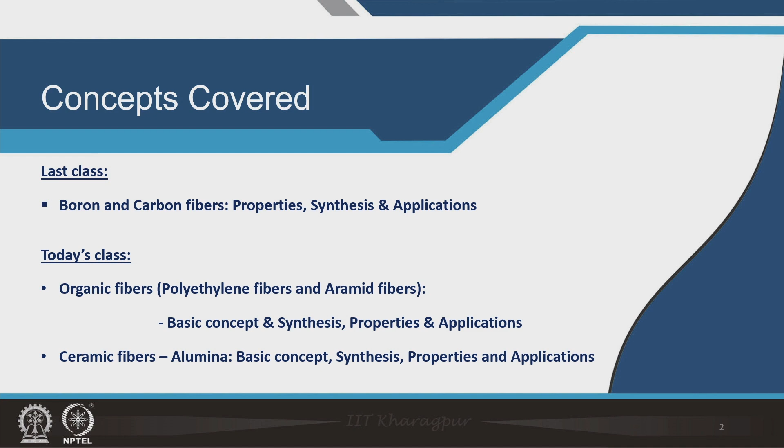Today's class will discuss aramid and ceramic fibers, focusing on alumina among ceramic fibers. In the last few classes we discussed glass fiber, boron and carbon fibers. Now I want to shift toward organic or polymeric fibers, which I haven't discussed yet, and which are used hugely in commercial applications. Then I will shift into ceramic fibers, which show extremely high temperature strength. In today's class, for ceramic fiber I will talk about alumina fiber, and in subsequent classes I will go into SiC fiber and other fibers.

Let us start talking about organic fibers, which are basically polymeric fibers. The idea is to align the long chains in the axial direction to make fibers that achieve fairly high strength and modulus. Polymer materials normally do not show very high modulus, in the range of 10 GPa, but if you align the polymeric chains properly, you can achieve higher modulus. As you can see here, the data shows around 70 GPa.

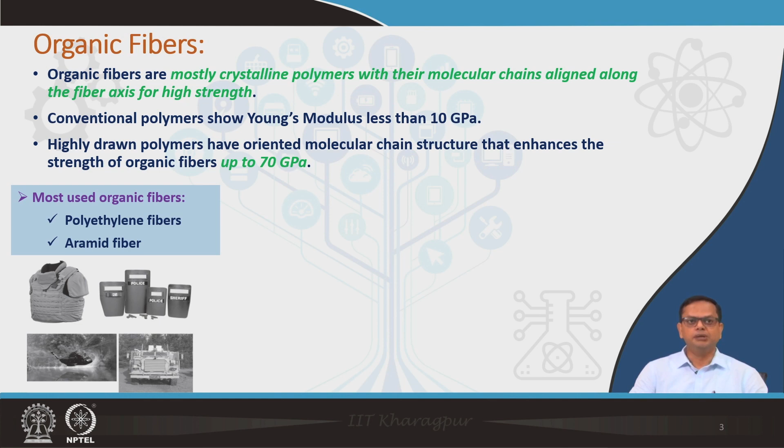Polyethylene fibers, or high molecular weight polyethylene fibers, are mostly crystalline in nature and are made by gel spinning. This spinning method is one way fibers can be synthesized, and ultra high molecular weight polyethylene is made by the gel spinning method. It shows fairly high strength and modulus, though not as high as aramid fibers, but the specific values are quite high.

Applications include protective vests in military applications, and riot shields as shown here. The fibers used to reinforce these kinds of vests are polyethylene fibers in most cases. Also Kevlar or aramid fiber is used, and then ballistic armors and similar items use these polyethylene fibers. But in today's class I want to concentrate more on aramid fiber.

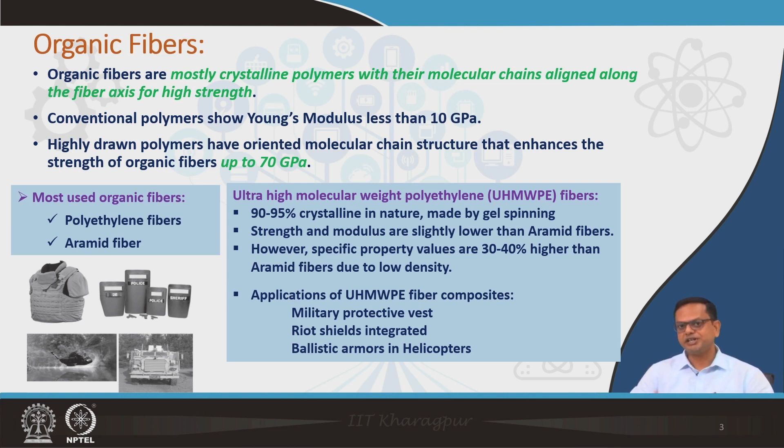Let us talk about aramid fiber. From the name, you can see it is basically a combination of aromatic and amide groups. The amide group is CONH2. This CONH2 group is the amide group, and when you attach aromatic rings to it, you get the aramid structure.

You can see here that CONH resides between two aromatic rings, but there can be multiple combinations by which amide and aromatic groups can be attached. For example, you can have a couple of amide groups together with one aromatic, or two aromatics together with one amide group. There could be multiple variations attaching amide and aromatic groups, and we do not call all of them Kevlar or aramid fiber.

Kevlar is the commercial name; there are other commercial names as well, like Technora, but basically it is aramid structure. We do not call everything with an amide group and aromatic group aramid fiber. So what is the definition of aramid fiber?

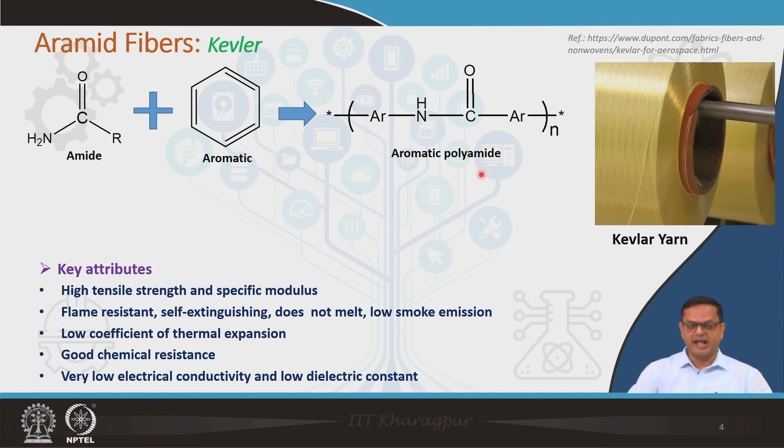One thing has to be made sure is that at least 85% of these amide groups are attached in between two aromatic groups, then only we call it aramid fiber. The Federal Trade Commission has given a definition that a manufactured fiber in which the fiber forming substance is a long chain synthetic polyamide in which at least 85% of the amide group, that is CONH group or linkage, are attached directly between two aromatic rings.

Why are we talking about aramid fiber? Because of high strength, modulus - very important factor. These are flame resistant, even though these are polymer materials. They are self extinguishing, do not melt, and have low smoke emission. That is why these are used in military applications.

Low coefficient of thermal expansion, good chemical resistance - again a very important factor - and low electrical conductivity and low dielectric constant. Because of all these attributes, Kevlar fiber or aramid fibers are used in these kinds of applications, as I was showing earlier.

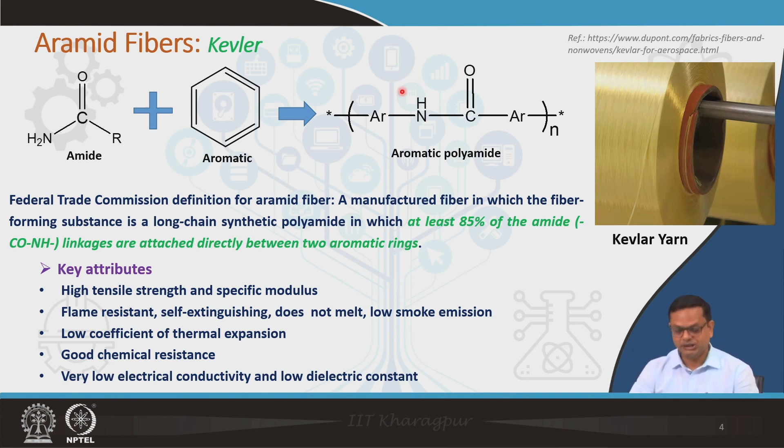Why do we need to go for this low temperature? This low temperature is extremely important to inhibit byproduct formation. What do we mean by byproduct formation? As I mentioned earlier, I want this polyamide, this amide group, to be attached between two aromatic rings, and that should be around 85%. If something else happens, we call that a byproduct.

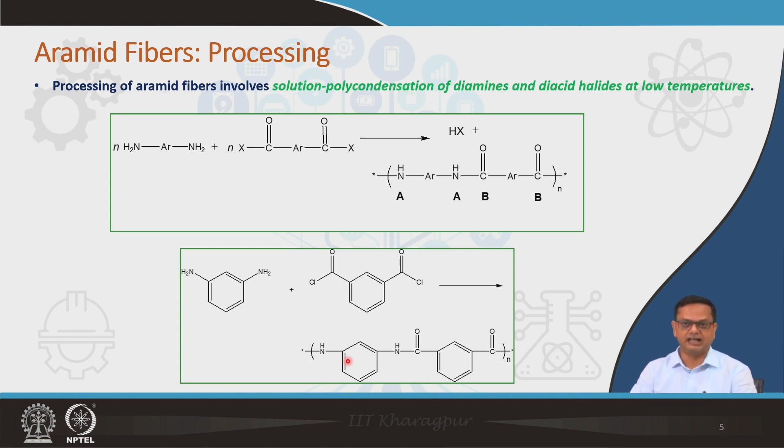It has to be done at low temperature to inhibit byproduct formation, and another very important factor is to promote linear polyamide formation. We do not want any cross linking to take place - ideally there should be no cross linking or other structure formation. It should be a linear structure, because linear structure gives higher axial strength and modulus. That is why the whole reaction is done at lower temperature.

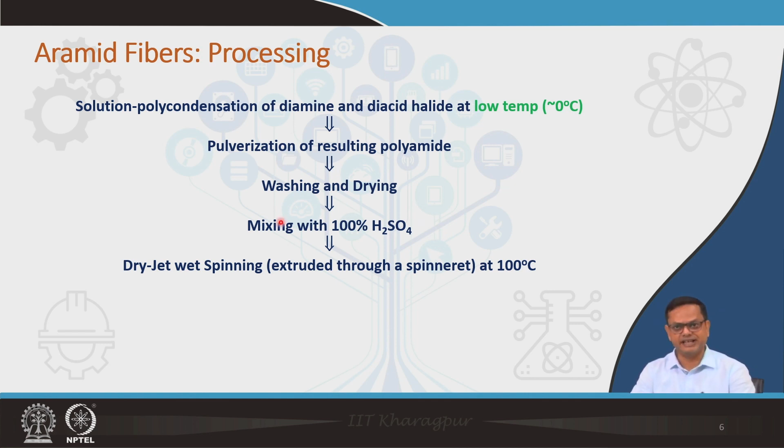Now let us concentrate on this mixing with 100% H2SO4. What exactly happens in that stage? After the solution polycondensation reaction of diamine and diacid halide, you get this polymeric chain of aramid.

Okay, this is a random coil structure. Now, as it comes in contact with 100% H2SO4, it goes through certain kind of structural change.

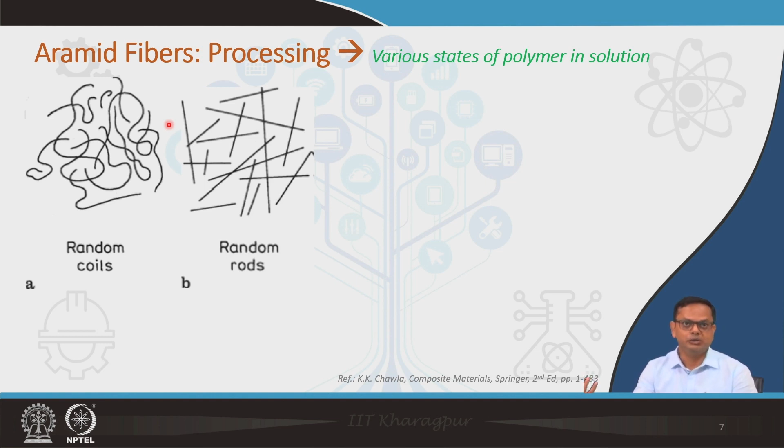What happens? The first thing is that these random coils get straightened out and give this kind of random rods. And with time, these random rods get aligned and make groups like this kind of liquid crystalline state. So you can see a number of random rods come together, come closer, and make this kind of liquid crystalline zones.

So this kind of alignment takes place in presence of H2SO4, and finally what happens with these regions is that ultimately you get this kind of nematic liquid crystal structure.

What is nematic liquid crystal structure? Nematic means basically when you have aligned this kind of rods, however this alignment is random. Okay, that is called nematic.

So obviously, there is some regular kind of alignment, that is called smectic. I think the difference here is that in nematic the alignment is in a particular direction, true, but then the alignment of the rods are actually random. But here you can see they are actually in groups in case of smectic.

So in case of Kevlar or aramide, where you make this kind of liquid crystal, we are calling it nematic liquid crystal, where the alignment is in a particular direction, however these are not in groups.

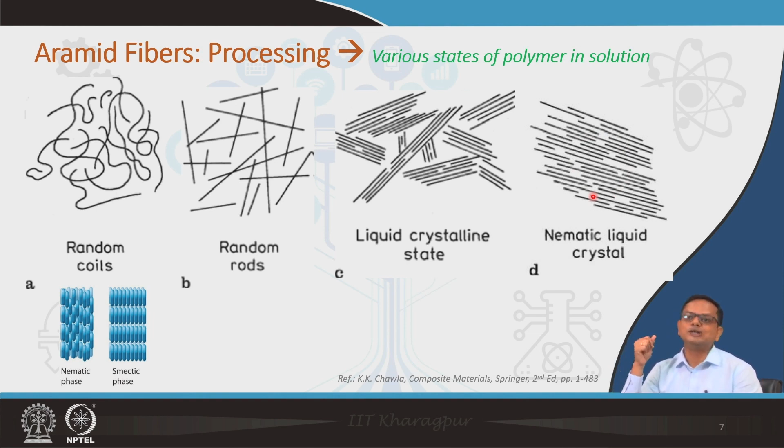Okay, so now once this thing is done, the process of dry jet wet spinning comes into picture. So if you see here, this is the process of dry jet wet spinning method. You can see this liquid crystalline state is there, the domains are there. These are all nematic liquid crystalline domains, and now these domains are pulled through this dry jet wet spinning method.

So you can see this is an air gap at around 4 centimeter, 1 to 4 centimeter, and through this air gap some evaporation takes place of the solvent. Okay, so that's why it is required.

So this is the dry spinning stage, and then there is a coagulation bath. Coagulation bath is nothing but basically low temperature water. So that basically washes off the extra H2SO4 which was being used earlier to go through these particular steps from random coils to ultimately get this liquid crystalline state.

So basically to wash off that extra H2SO4, this coagulation bath is required, and that is part of the wet spinning. So you have dry spinning and wet spinning, and that ultimately leads to the formation of the aramide fiber, from aramide material to aramide fiber. I hope the process is clear to all of you.

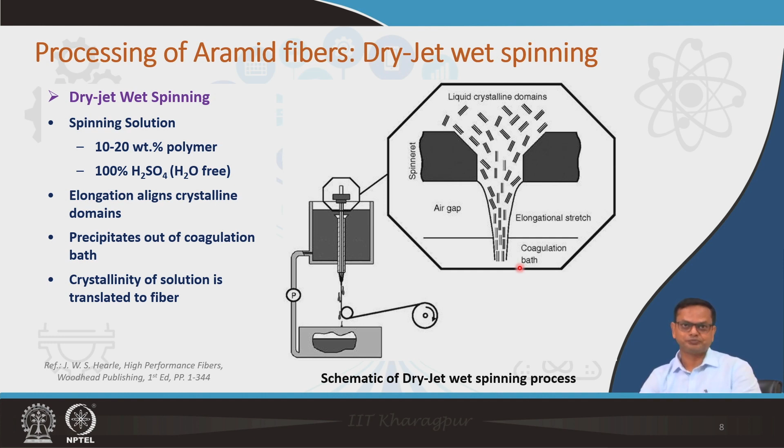So again we need to look into the properties, and depending upon what kind of Kevlar structure or aramide structure you get after the synthesis, you have varied properties, tensile strength and modulus. And another important factor is the tensile strain to fracture: for K49 it is 2.8 and for K29 it is 4.

So if I ask you which one should be used in case of making ballistic vests, for example comparing K29 and K49 - obviously the modulus is higher in K49. Does that mean we should use that for reinforcing ballistic vests?

We also have to look into the data of tensile strain to fracture. In this case, the tensile strain to fracture is higher in K29. That means, before the fiber tears off or gets fractured or fails, it leads to more amount of tensile straining before fracture.

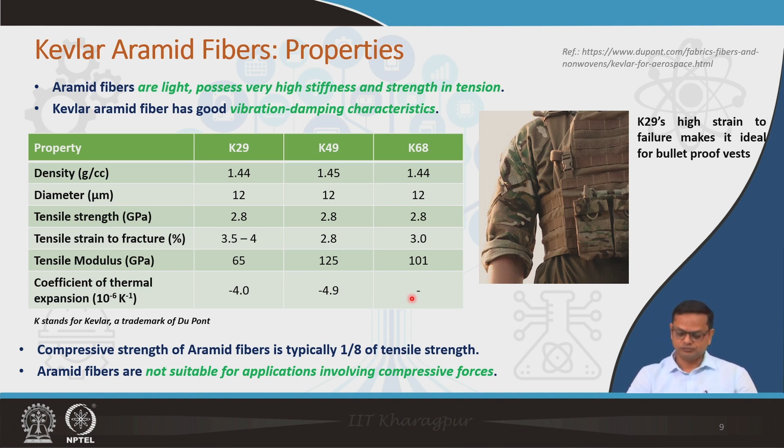And now we should look into the applications as well. So there are multiple applications, starting from bullet vests to diving gloves, boots, walking boots, military helmets. So the weight has to be very low. These are made of polymers reinforced with Kevlar fiber or aramid fibers.

Different kind of gloves, bicycle tires, yes. In some bicycle tires, heavy duty bicycle tires, Kevlars are used for strengthening the tires. Car tires as well.

Fireproof clothing, yes, because as I was mentioning earlier, Kevlar fiber, aramide fiber being a polymer, still it does not catch fire, it does not evolve too much smoke, in fact it acts as a fire extinguisher. That is why in case of making fireproof clothing, aramide fibers are used.

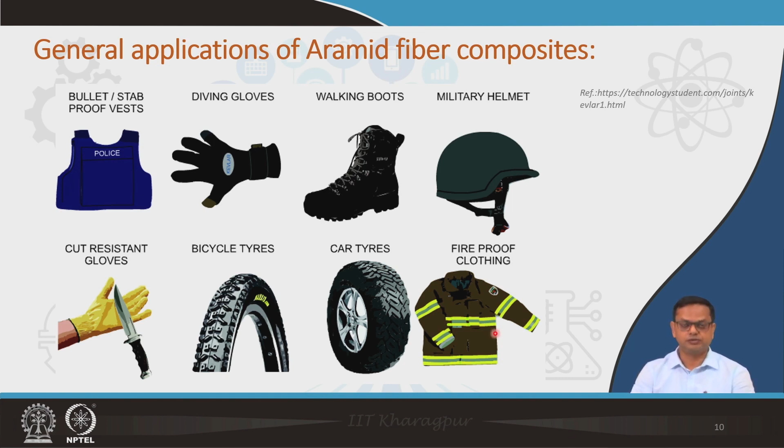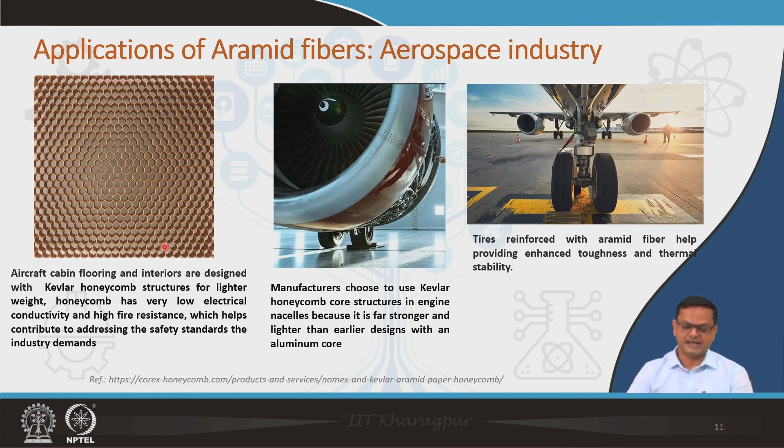There are some more applications. Honeycomb structures are used in aircrafts, for example, flooring and different kinds of panels. These aramide fibers are used for that.

Now, I have talked about aramide fiber or organic fibers as such. So far we have discussed glass fiber, then boron fiber, carbon fiber, and now we discussed what you call polymeric fiber or organic fibers. Now, it is time to move into ceramic fibers.

Different kinds of ceramic fibers are there, like oxide fibers and non-oxide fibers. For oxide fibers you can see alumina, silica, mullite, zirconia. Similarly, for non-oxide fibers it is mostly silicon carbide.

Why do we prefer ceramic fibers? The single most important parameter for which ceramic fibers are chosen is their high temperature strength. The other fibers I have talked about so far, the organic fibers or glass fiber, actually lose their mechanical properties at higher temperature. Not carbon fiber, but the other fibers lose their high temperature strength.

So, we are looking at high temperature strength and extremely resistant to corrosive media, then we should talk about ceramic fibers. You can see here high strength, high modulus, high temperature capability, free from environmental attack. That is the attributes of ceramic fibers.

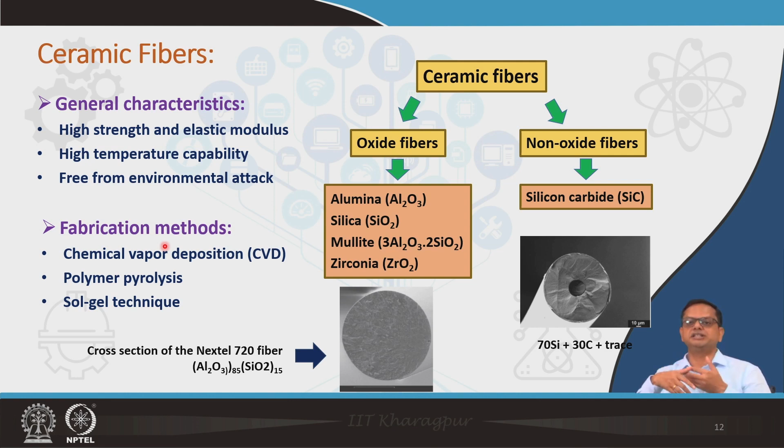The next one is polymer pyrolysis. What is polymer pyrolysis? You need to think about a precursor which has high molecular weight. This is a polymeric precursor having high molecular weight and long chains, and it should contain certain elements. For example, let's say I am trying to make silicon carbide fiber, that means it has to have silicon in it. It is a polymeric material containing silicon, and carbon is anyway there, and we have to do certain things so that this silicon and carbon combine and we get silicon carbide, getting rid of the rest of the elements by a pyrolysis technique, or higher temperature synthesis technique, which is called polymer pyrolysis.

So, a precursor is polymeric long chains containing certain elements. These certain elements combine and give you the fiber material, but the other elements which are not required get removed by the pyrolysis technique.

And the last one is obviously the old age technique of sol gel technique. That means basically you go through a process of making sol and then gel, and then ultimately you go for calcination to get the fiber material.

You can see here different fiber materials. For example, here you can see Nextel 720 fiber. Basically it is a combination of alumina and silica material, and here is another fiber which has 70 Si 30 C, and then the other trace elements are there.

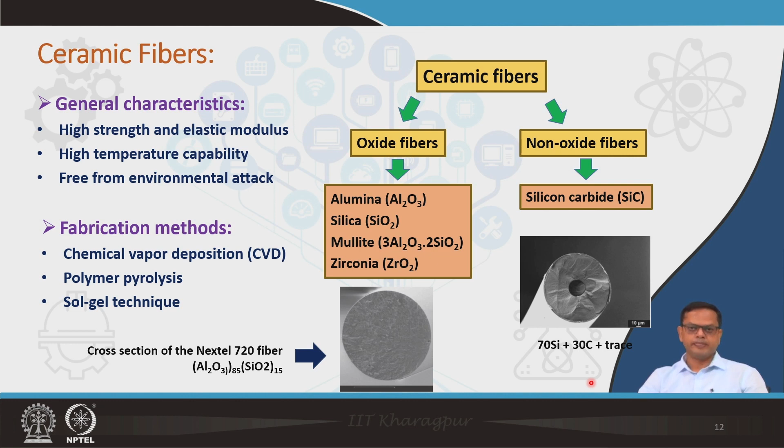So, let us talk about synthesis of ceramic fibers. We will now take a particular example of fibers like alumina fiber, and we will talk about that. I already mentioned polymer pyrolysis.

What is polymer pyrolysis? It is the pyrolysis route of processing ceramic fibers with polymer containing silicon, carbon, nitrogen and boron, with the end products being silicon carbide, silicon nitride, boron carbide, boron nitride, different kinds as you can see here. So the polymer chain has to contain, let's say you want to make boron nitride fiber, so the polymeric chain has to contain boron and nitrogen, and your aim has to be to make this BN structure by the pyrolysis method.

Similarly, if you want to make Si3N4, then it should contain silicon and nitrogen atoms, and ultimately at the end it will form Si3N4.

And sol gel technique, as I have already mentioned, the important factor here is that it is used to produce a variety of commercial oxide fibers. So, one thing we have to keep in mind is that in case of sol gel technique you can make only oxide fibers. The precursor material here is alkoxide. Alkoxide means what? You can see here M(OR)n. So let me give you a very simple example of what alkoxide is.

Let us consider this reaction: CH3OH reacted with NaCl. What do you get? You get CH3ONa plus HCl. Now, this CH3ONa, as you can see, is basically R-O-M, where R is the organic group, O is oxygen, and Na represents M. So this ROM structure is the alkoxide structure. In case of sol gel technique, the precursor material is some form of alkoxide, and I will discuss how this alkoxide leads to formation of M-O-M. So you can see this is the oxide you are making.

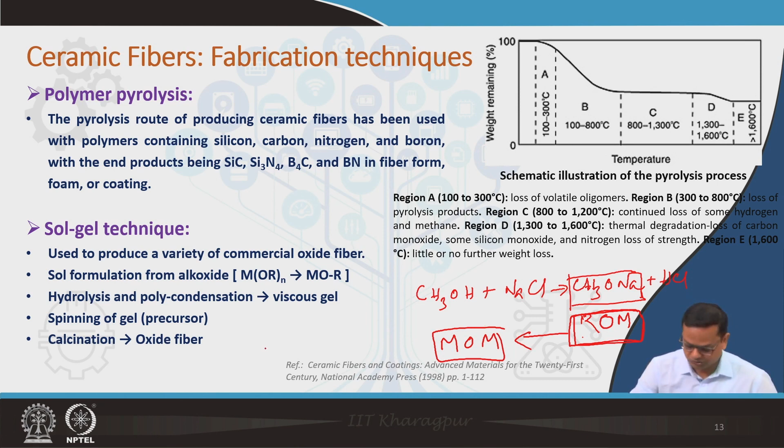Let us move to the next one. Sol gel technique is a process used for fabrication of metal and ceramic oxide, and it involves conversion of monomers into a colloidal solution, which we call sol. The precursor material, as mentioned earlier, is M-O-R, which is basically an alkoxide. You choose a certain solvent in which the alkoxide is dissolved to make a colloidal solution, and this colloidal solution goes through hydrolysis and polycondensation reaction. I will show you again, and that forms a network of gel. Gel is basically a viscous material, and once you get this gel, you make fiber out of it. Remember, this gel is yet to form the oxide, it is not the oxide.

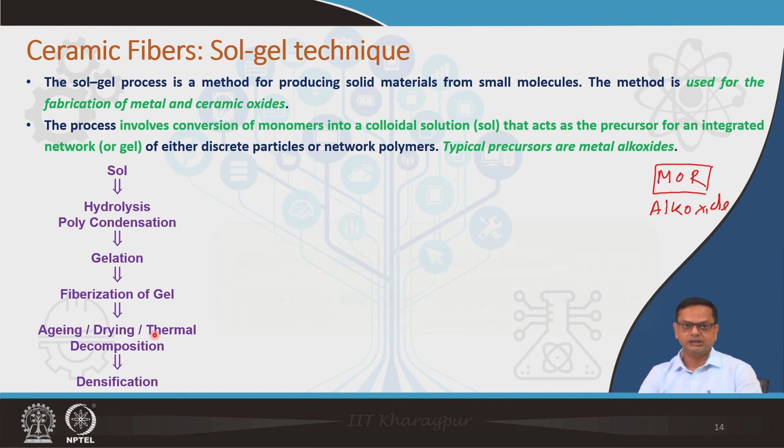This gel goes through a calcination process of aging, drying or thermal decomposition, and that ultimately leads to formation of the oxide. For example, this is M-O-R, and you go through a hydrolysis process to get M-O-H and R-O-H. Then two M-O-H molecules ultimately give you M-O-M and H2O, and that is water condensation method. Similarly, this M-O-H can also react with the first material M-O-R, and that can give you M-O-M and R-O-H, which is called alcohol condensation. So it could be water condensation or alcohol condensation, but the final product is M-O-M, or an oxide.

And that is how, by sol gel technique, you can also get ceramic fibers. To recapitulate: first you make a sol of alkoxide using a particular solvent, and then that sol goes through hydrolysis and polycondensation, forming a network of gel. That gel is made into fiber, and this fiber goes through the process of calcination, which leads to formation of the oxide fiber.

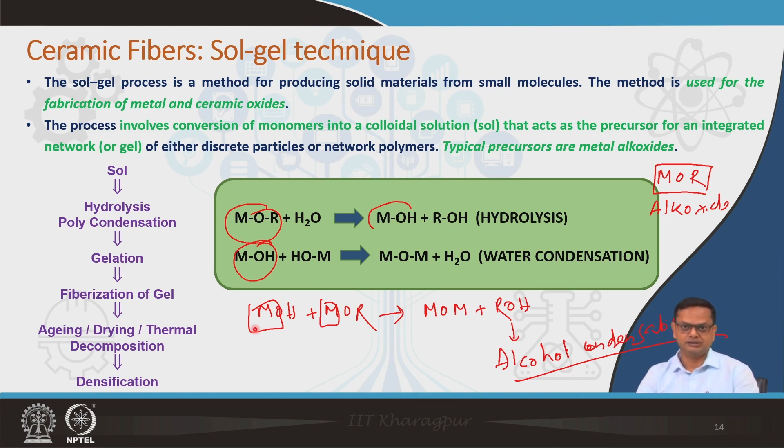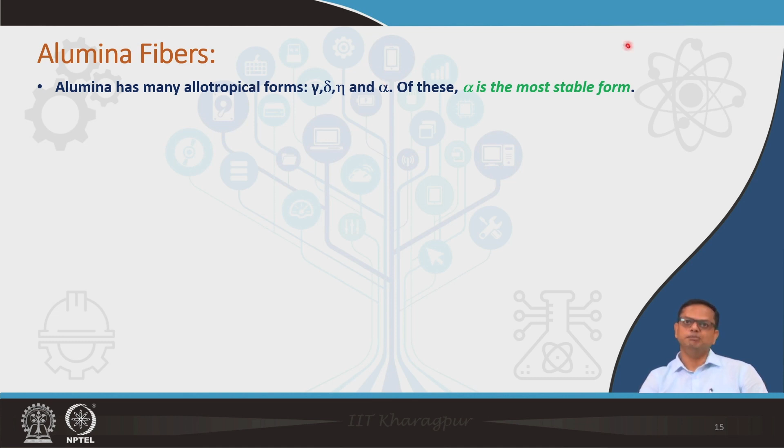The first one I want to discuss here is the alumina fiber. Alumina has several different allotropes like eta, gamma, alpha, and others. Alpha is the most stable form, and it also shows fairly good mechanical properties compared to the other allotropes. So the idea here is to make alpha alumina when you try to make alumina fiber.

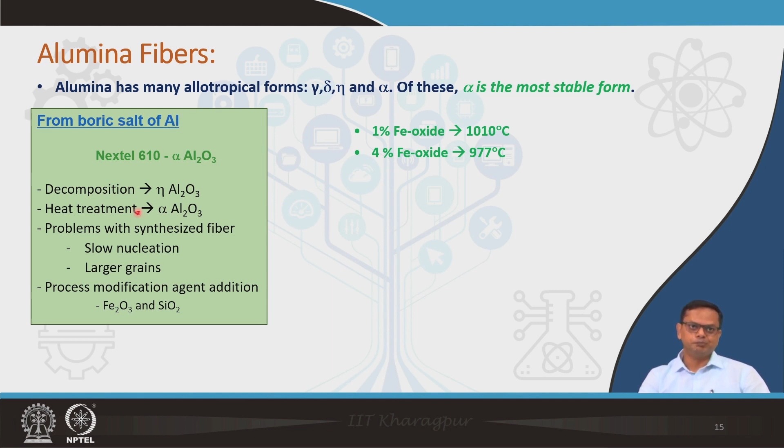The starting material here is this boric salt of aluminium, which is the alkoxide precursor material. This precursor material can decompose at high temperature by the process of sol-gel technique, and it gives you eta Al2O3. Obviously you do not want to stop there, so you go for heat treatment to get alpha Al2O3. In this process, going from eta Al2O3 to alpha Al2O3 through heat treatment, the basic problem is that this process is very slow, which leads to increase in grain size and, in turn, deterioration in mechanical property.

How do you get rid of this? The idea is that this slow nucleation process has to be changed to a faster nucleation process. What can be done for that? A process modification agent, or nucleating agent, could be used - for example, iron oxide, Fe2O3. A nucleating agent, hydrous Fe2O3, could be used, and that will enhance the nucleation process. Now, why Fe2O3? Actually, Fe2O3 has an almost similar structure, or is isostructural to Al2O3, and that is why it acts as a perfect nucleating agent for Al2O3. The kinetics of the nucleation process gets enhanced, and you get a very fine Al2O3 in the process.

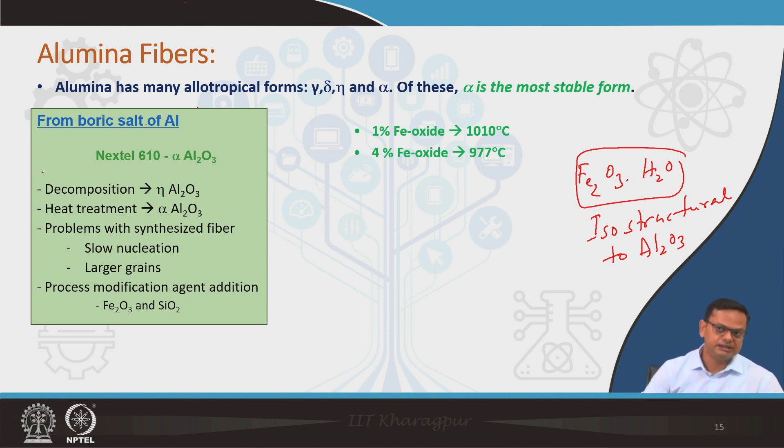Depending upon how much iron oxide you used, you can see the temperature ranges from 1010 degrees Celsius to 977 degrees, so a decrease in temperature takes place in the process. That is the basic technique of alumina fiber synthesis: you start with a boric salt, get eta Al2O3, then go for heat treatment to get alpha Al2O3, using a nucleating agent, either Fe2O3 or SiO2, to ultimately get very fine grains of Al2O3.

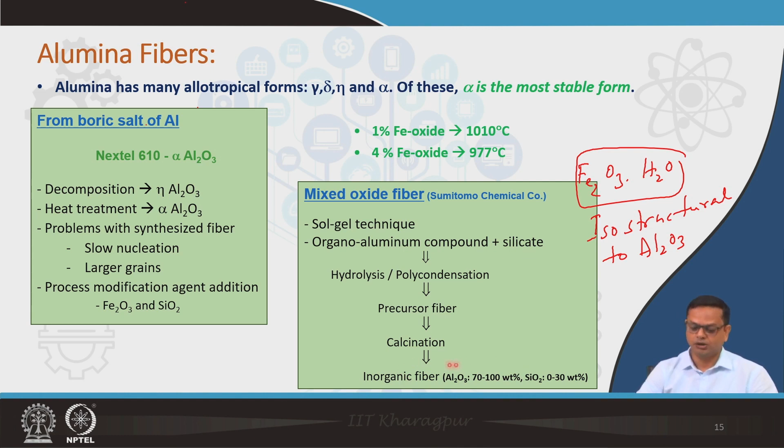Similarly, by adapting the Sol-Gel technique, you can get mixed oxide fiber as well. You can start with an organo-aluminum compound with silicates, go through the Sol-Gel technique, and ultimately get a mixed fiber of alumina and SiO2.

There are multiple examples by which you can make alumina fibers. For example, in this case the precursors are aluminum nitrate and malic acid, which again goes through the steps of Sol-Gel: gel making, then spinning to get the gel fiber or precursor solution, which goes through condensation and is hand drawn to get the precursor fibers, then drying and sintering, called calcination, to get alumina fiber. Depending on the calcination temperature, there are different temperatures like 800, 1000 and 1200 degrees Celsius, and from gamma to alpha, at higher calcination temperature you get a better structure of alpha alumina.

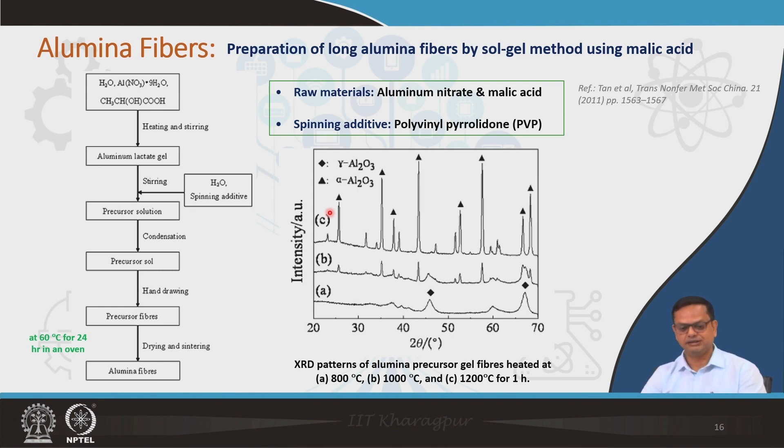So there are multiple routes and multiple precursors by which you can get alumina fiber, but the basic process is mostly similar: you go through some kind of sol-gel technique to get these oxide fibers.

Now looking back into the properties, you can have alumina silica fibers, that is mixed fiber, or you can have alpha alumina. Different companies have different commercial names, from Altex to Nextel - there are different series of Nextel fibers made by 3M company. Similarly, Sumitomo has made different kinds of alumina fibers as well.

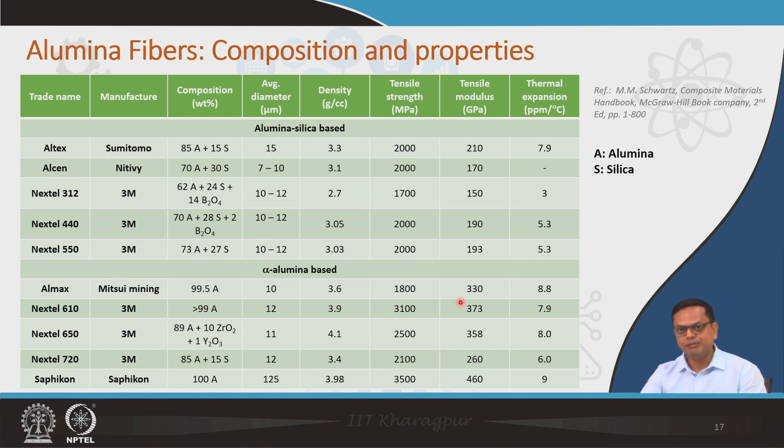The basic point to take from here is that it has very high tensile strength, in the range of 2 to 3.5 GPa, quite high, and modulus is also in the range of 200 to 400 GPa, depending on the ultimate final product. So again you can achieve very high strength, high modulus, and a wide range of properties.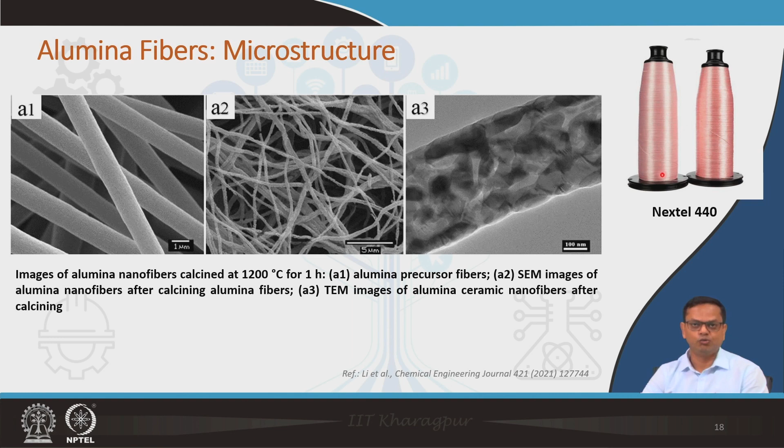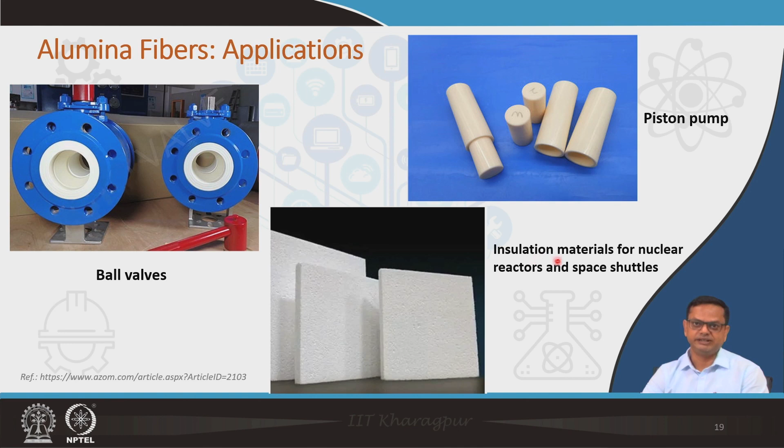You can see here how alumina fiber looks like - a spool, Nextel 440 spool, continuous alumina fiber. Applications include ball valves, piston pumps, and insulation materials for nuclear reactors and space shuttles, so exotic applications. The application of alumina fiber or alumina silica fiber is high temperature application where you need high strength and high modulus.

So ultimately I come to the conclusion of today's class. I started talking about organic fiber, where I discussed two different fibers: polyethylene fiber and aramid fiber. Polyethylene fiber is made by gel spinning, while aramid fiber is made by a unique technique called dry jet wet spinning method. The advantage of these fibers, especially aramid fiber, is that it shows very high, fairly high strength and modulus.

It does not catch fire; in fact it acts as fire extinguisher. That is why these are used in military applications and fire fighting applications.

Then we talked about ceramic fibers, starting with the basic fabrication techniques. There are three techniques as I mentioned earlier: the first is polymer pyrolysis, second is sol gel, and third is chemical vapor deposition. We have talked about sol gel. In the next few classes, we will talk about CVD method and polymer pyrolysis by which these ceramic fibers are synthesized, and we talked about alumina fiber today, which is basically made by sol gel technique.

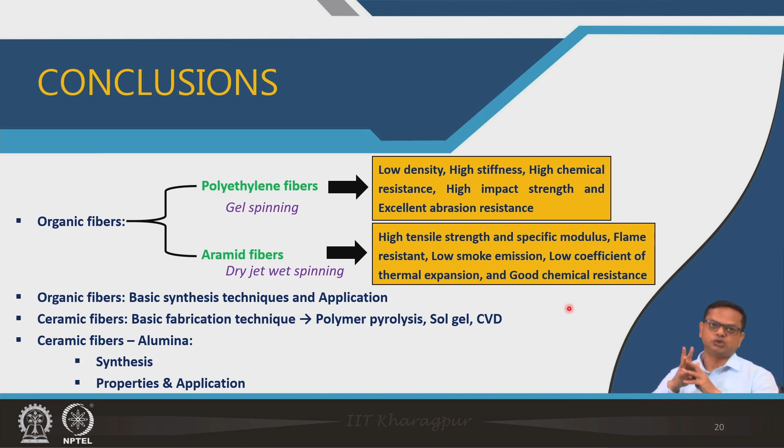So in the next class, my plan is to talk about some more ceramic fibers like silicon fibers and whiskers of silicon carbide, how they are synthesized, their properties and applications - those few things I want to concentrate on in the next class. So with that, I thank you all for lending your ears, and I meet you in the next class. Thank you all.